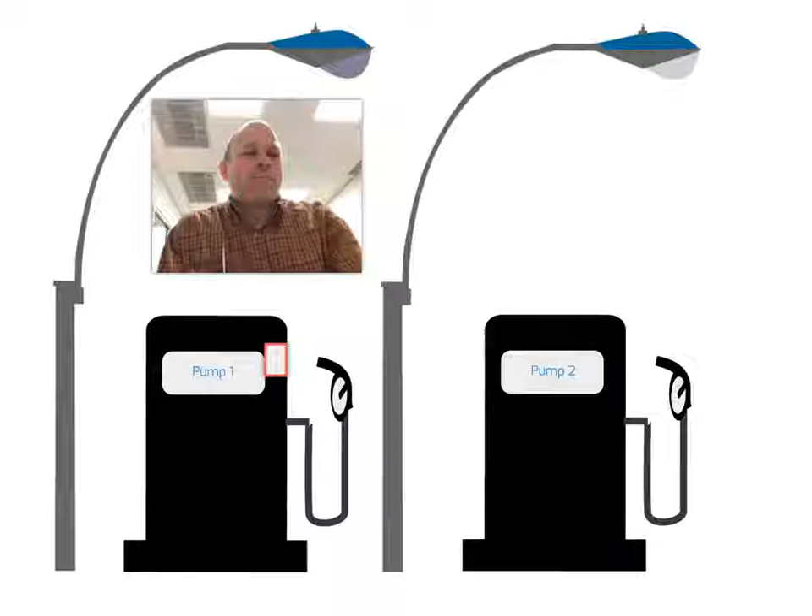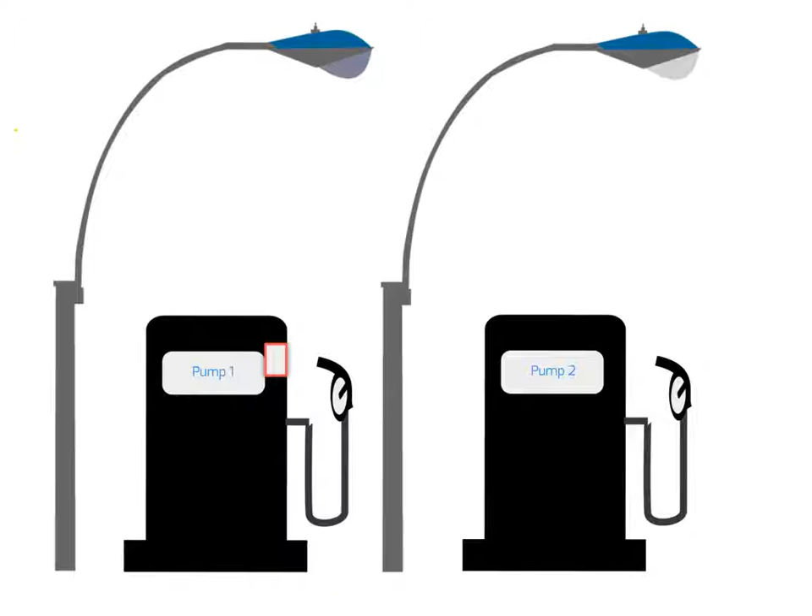So let's start talking about the zone zero location. The zone zero location is where the nozzle goes into the nozzle boot. Now the nozzle boot is this area right here. Now you can see the little square with the red around it, the little red zone around it. That indicates that that's a zone zero location.

Okay, now zone zero simply means if we don't have to put wiring there, we don't. Now, if we absolutely had to, we could. But the nozzle boot is really where your nozzle, which is this guy, hangs up. That's where the gasoline nozzle kind of holds itself while it's not in use. And again, that is a zone zero.

If we absolutely had to put any kind of equipment in the hazardous location that's classified as a zone zero, it has to be deemed intrinsically safe. Intrinsically safe uses methods that prevent a spark from ever happening. It's expensive, and that's why, as a general rule, we call it a no-fly zone, in essence meaning if we don't have to put equipment there, we don't.

The other method that we can use in a zone zero location is not just intrinsically safe, but we can actually use the equipment protection level through encapsulation. And encapsulation in the Canadian Electrical Code has kind of an acronym. It's MA, and MA is the designation for encapsulation. So equipment in a zone zero can be encapsulated.

It also has to provide the equipment protection level GA. Okay, this is the highest IEC level of protection that you can get, and again it's called GA. So when you go to buy equipment, it has to have the designation GA on it in order to install in a zone zero location.

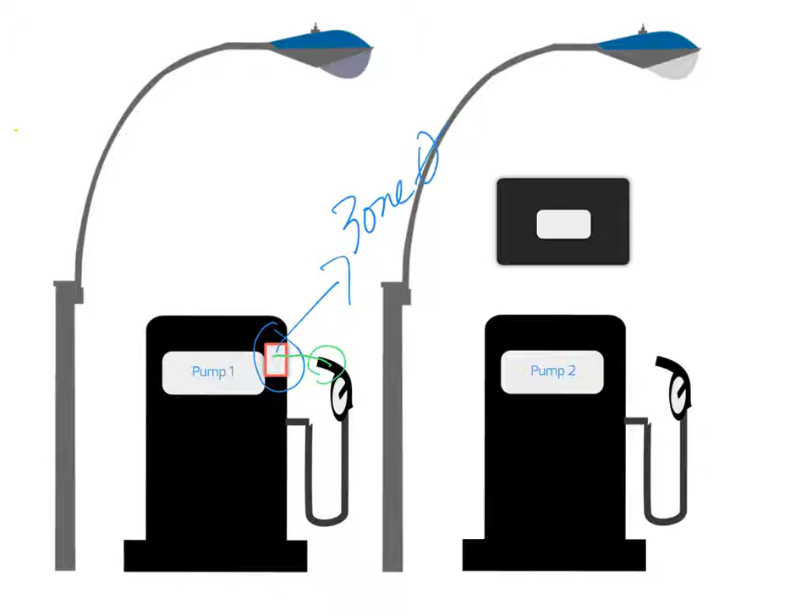So let's now start to take a look at what happens inside the pump. It's important to note that inside the pump, of course, there is a barrier, and that barrier actually is usually some sort of a vapor type barrier, and it's usually somewhere in here. And so when we look at how the zones kind of shape up here, it's important to note that below that vapor barrier is considered a zone 1 location. And above that vapor barrier, it's considered a zone 2 location.

Now, often it isn't necessarily just a vapor barrier. It may be a non-physical barrier. It also may be some sort of an enclosure that you actually have to remove to get your wiring in. But all the same, that's how the zones break out.

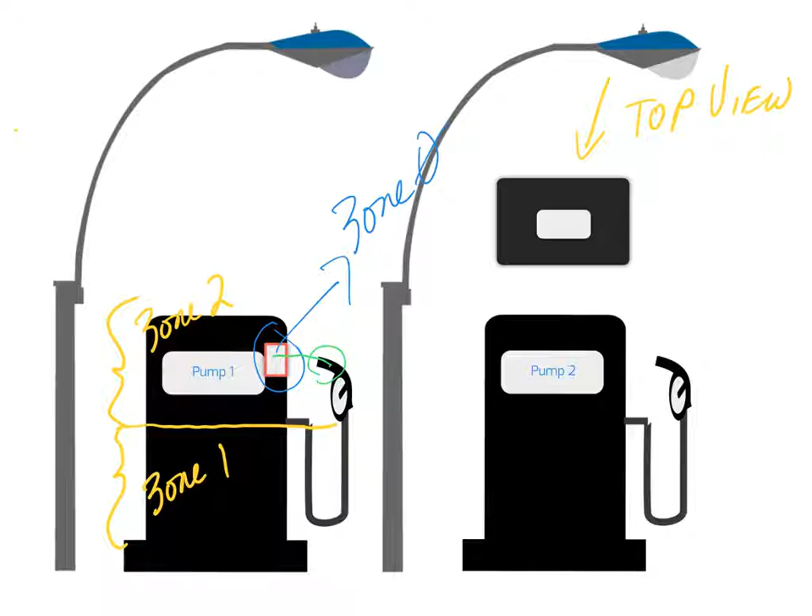Now, that zone 1 location, when we look at a top view, which is what we're looking at here, this is kind of a top view of the pump. And that top view is going to tell us how far inside the pump, that's what we're looking at, is inside the pump, where that barrier is separating the zone 1 from the zone 2.

Your zone 2 location is right here. And that zone 2 is next to a zone 1 location, which is 450 millimeters towards the inside. So the first 450 millimeters towards the center inside of that pump is a zone 1 location. The very center core of it is a zone 2.

Now, outside the pumps, of course, we have to consider that there's also a hazardous location, and it's a zone 2 location that's 450 mil above grade. So 450 millimeters above grade, and that extends outwards 6 meters in either direction. That is considered a zone 2 location. Now that actually means it affects, of course, our light standards in this case. So any light standards or kiosks or anything in that area are considered to have a hazardous location.

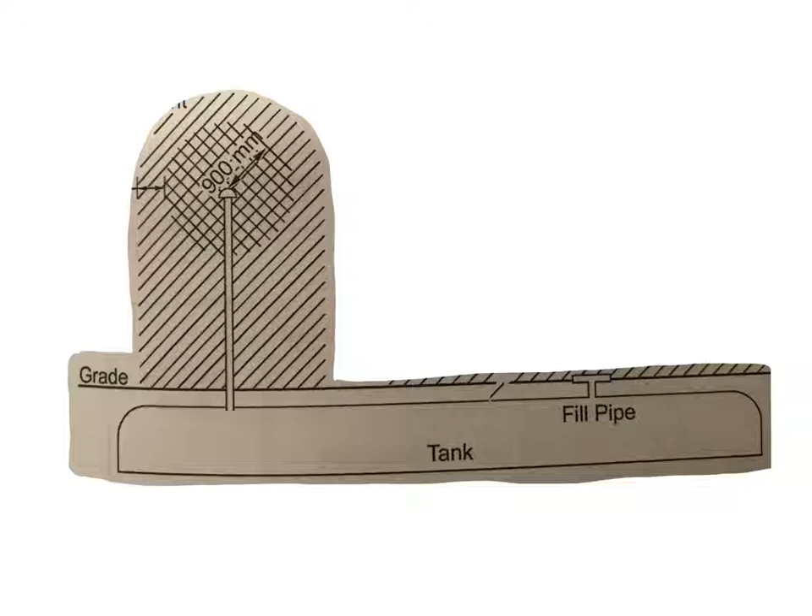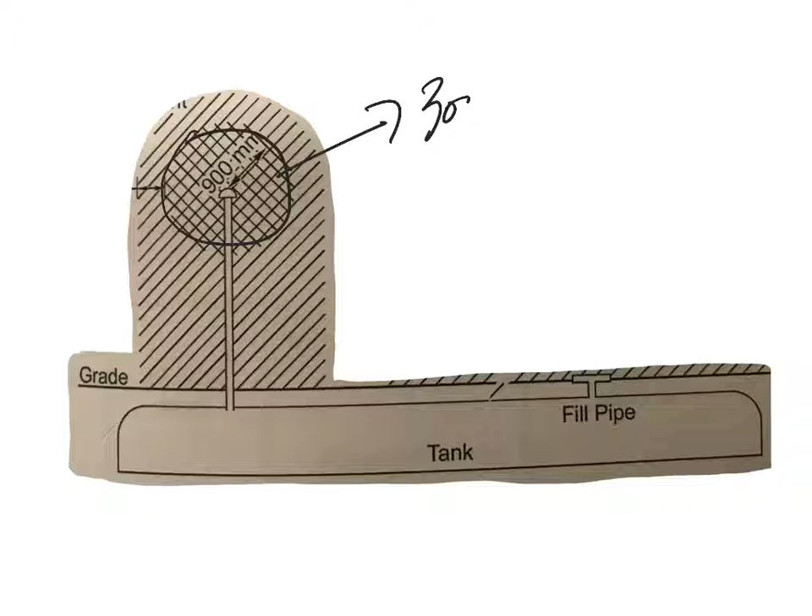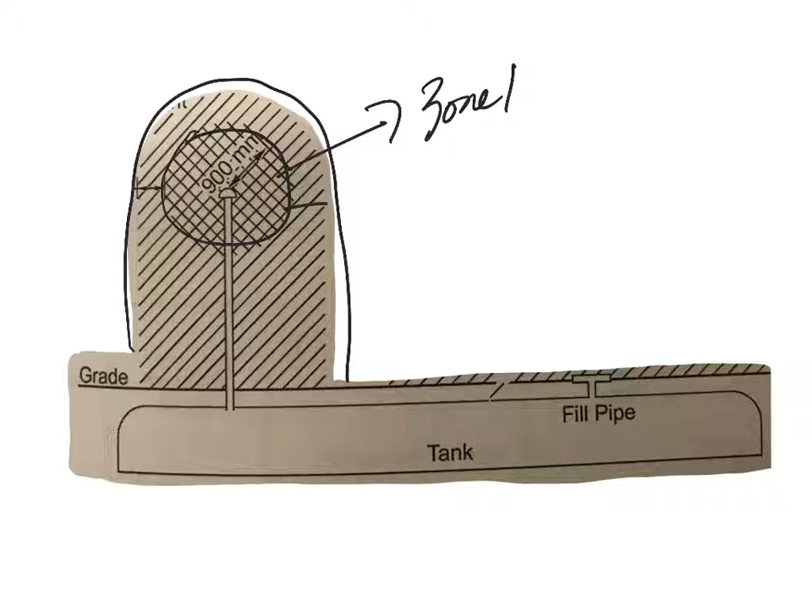Now let's take a look at the gasoline storage tank. This one's fairly simple. When we look at where our hazardous locations are, there is a 900 millimeter spherical area around the discharge pipe, and that is zone 1. Then anywhere between 900 mil and 1.5 meters, so we look at this guy here, that distance here, which is again 900 millimeters to 1.5 meters, is a zone 2 location.

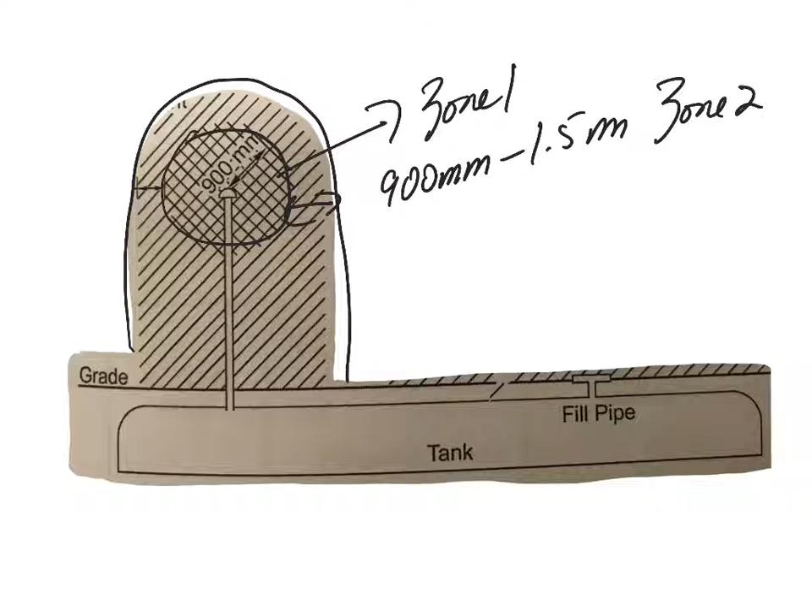In line with Rule 20-004 number 7, we also know that because we have a place where we fill, this is our fill pipe here, that whole area in here is classified as a zone 2 location, and that extends 3 meters either direction and upwards of 450 millimeters from that fill pipe.

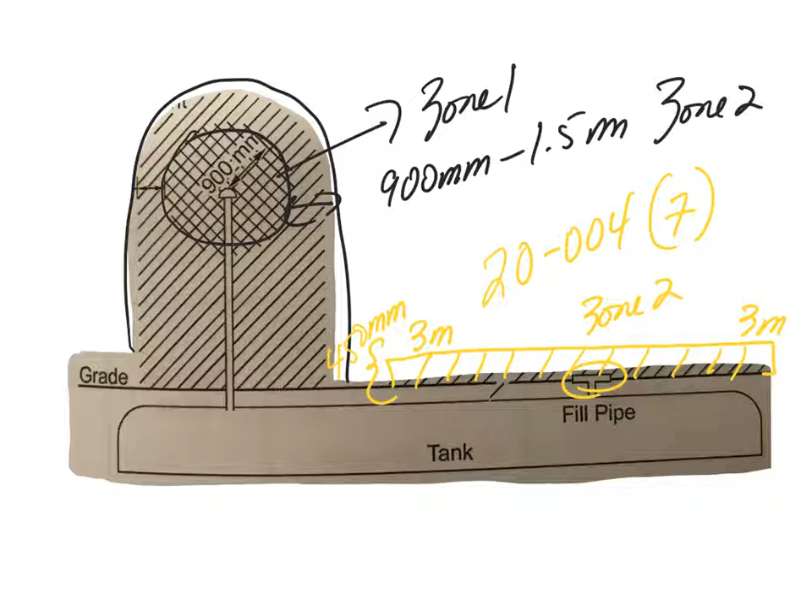And with that, that concludes the lesson on service stations where we fill up with gas, and of course that also included where the tankers come in and drop off their fuel. So happy installing.